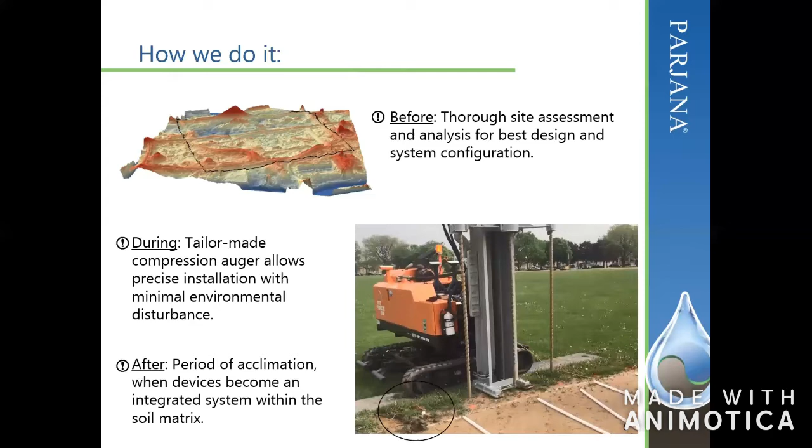After the EGRP devices are installed, how do these actually promote quicker infiltration, and do these need to climatize themselves to the local soils, the quality and velocity of water, possibly even the temperatures of these local communities? So to answer that question, I have here some old images that always come in handy.

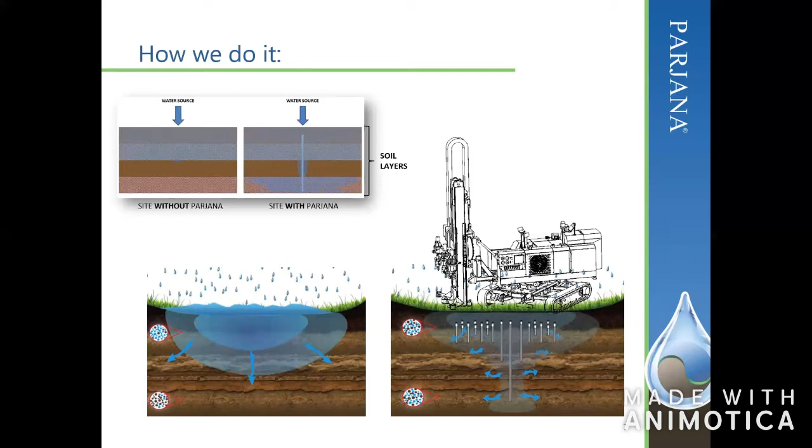Thank you, Lohani, for your expert overview of Parjana distribution and the EGRPs for these participants to fully understand your proven technologies before learning about a number of the diverse projects and applications you're actively involved in across the United States. So let's move into some of these projects. Looking at Belle Isle. So Lohani, what is the first project you wish to share with our viewers, and why did you select Belle Isle? All right, we are going to start with Belle Isle because it's a great representation of what Parjana can do for poorly drained sites.

The project was installed on Shelter 5, which has 23 of the 985 acres of the Isle. The shelter is the little blue rectangle in this picture. So Lohani, can you tell us where the testing procedures were during this study? Yes. Just before seeing that, I will give you a little bit more background. I will tell you the issue that they were having.

What was happening is that the amount of stormwater being discharged into the waste system was way too high. The total cost of stormwater management in the Isle would be as high as $1.5 million per year. So funded by a grant, Parjana took the challenge to infiltrate the stormwater before it would actually reach the system. A third-party consulting company, ECT, was responsible for this study that we are about to share.

The way they set up the study was they put flow meters in strategic locations of the stormwater sewer, both at shelter 5 and also shelter 4, which was taken as the control site right across from shelter number 5. Then ECT measured the flow rates caused by rain events before and after the installation of the EGRP devices, and these are the results.

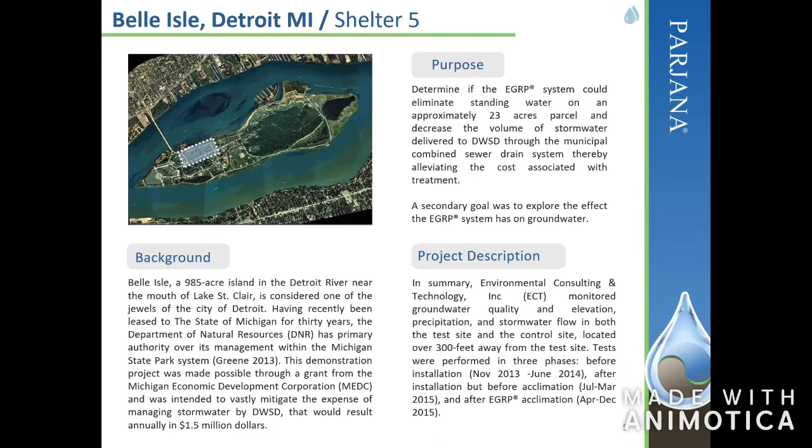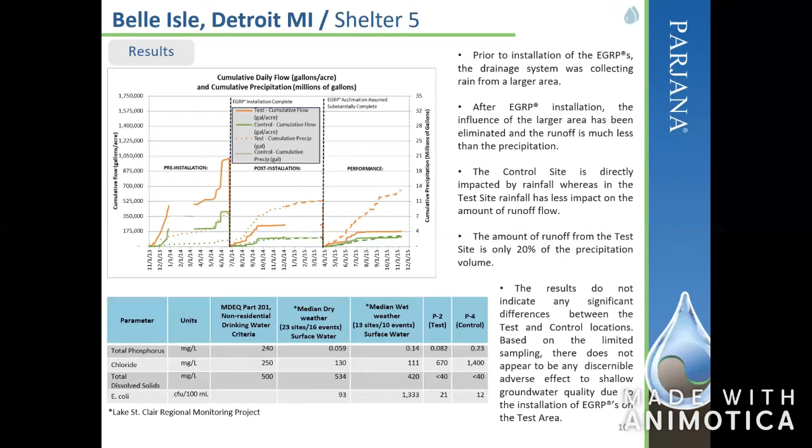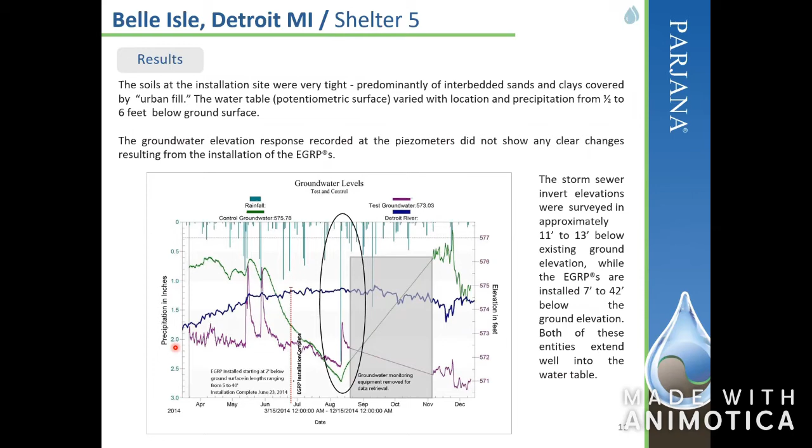These are many excellent ideas here, Lohani. Please highlight the points you just made for ease of our viewers' understanding before we move on to the next project. Of course. After testing Parjana performance, ECT observed no standing water at the test site. There was no measurable impact on the water quality of the affected groundwater. Smaller storms no longer contributed to stormwater runoff from the test site.

The groundwater elevation was not negatively impacted by the EGRP installation. The total runoff measured in the storm sewers exiting the test area was reduced by 80%. And finally, the test area became better drained, thereby reducing the saturated soils. And this completes our Belle Isle presentation.

What a great summary, Lohani. Thank you very much. Thank you.

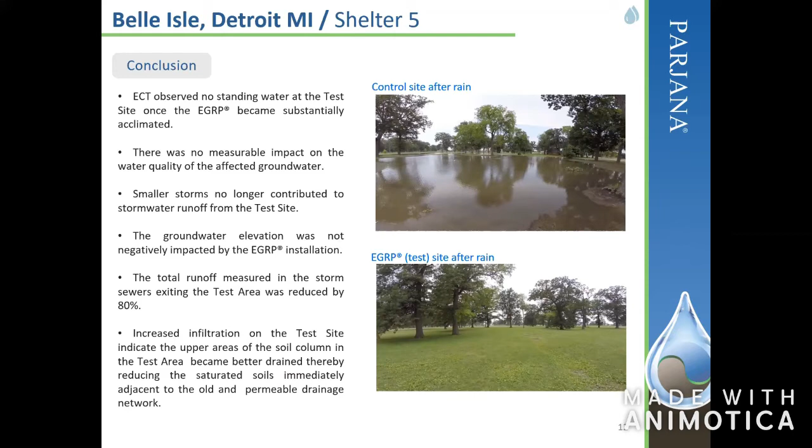This facility has critical importance because about 500,000 people who live in the area depend on groundwater to sustain life. With all of those people using groundwater, its levels have been lowering more and more over the years, therefore the challenge to recharge. We were very excited to be able to work towards such a noble cause.

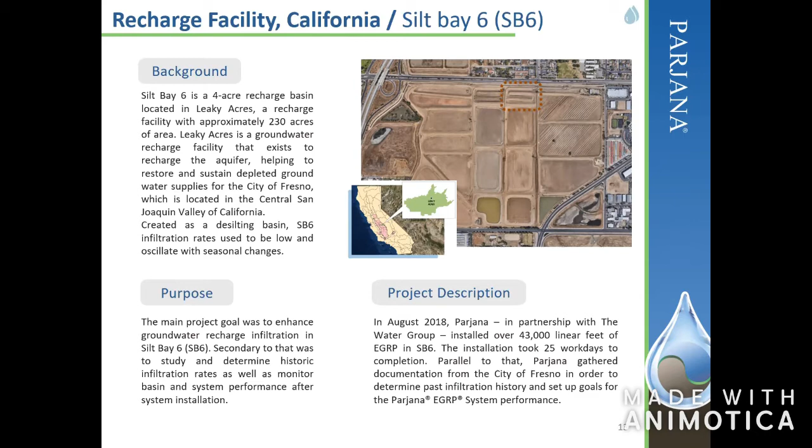What results have Parjana found at the California testing site? So the water levels at the basin were monitored since 2011. Based on those water level readings before the installation of the EGRPs, the basin used to infiltrate a little under 14,000 gallons per day.

After the devices were installed, that number increased to a little over 95,000 gallons a day, an increase of over 6 times the baseline infiltration. If you look at the upper graph, you can see that evaporation, depicted in brown, was 4 times as high as the infiltration before the devices were installed, sometimes even higher.

After installation, the basin started to infiltrate a lot more water than it would evaporate. Note the lower graph, the daily infiltration in green, and observe how those numbers have increased after the system installation in 2018. What are the advantages of infiltrating more water in this case, Lohani? It seems like infiltration is a major finding, most important to every community in the United States.

Well, first, one of the advantages of infiltrating water is that water infiltrated is water not evaporated. Every drop counts when we talk about water supply for over 500,000 people. Second, when water infiltrates quicker, more water can be added to the basin. By doing that, you're able to recharge more water per acre-feet of land in a given period of time.

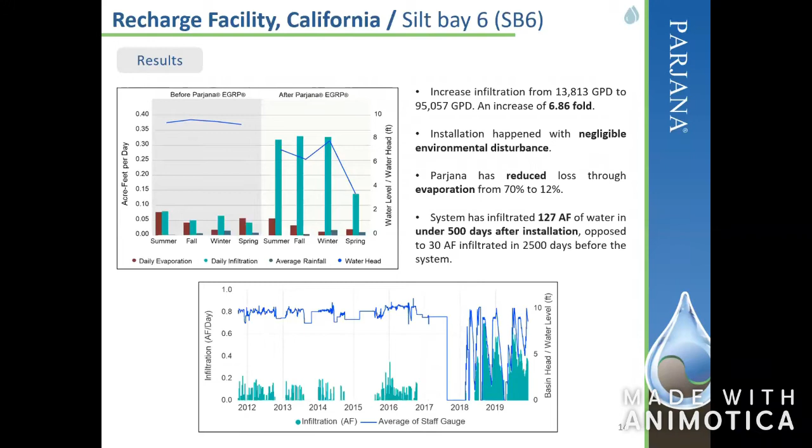So the next project will be about a parking lot in Michigan, and Zena will be the one telling you that story. Hi, Zena. Can you tell us a little bit about this project and why select a parking lot as a sample site? Hi, Dr. Sam. This is a Parjana project at LTU, which is located in a mixed residential commercial portion of Oakland County in southeastern Michigan, approximately 15 miles northwest of Detroit.

LTU was having standing water issues in parking lot D. They could not use the lot during heavy rainstorms because the area was flooded. LTU is leading a collaboration between industry partners. The project features the implementation of innovative and scalable integrated drainage design. This design significantly mitigates polluted parking lot stormwater runoff.

Parjana was one of these innovative partners working to improve infiltration and decrease urban runoff, as well as reduce flooding without having negative effects on groundwater levels and groundwater quality. Another goal is to balance soil moisture. Well, it sounds like there's many advantages here. Please tell us about the project setup and then why this type of setup for EGRPs.

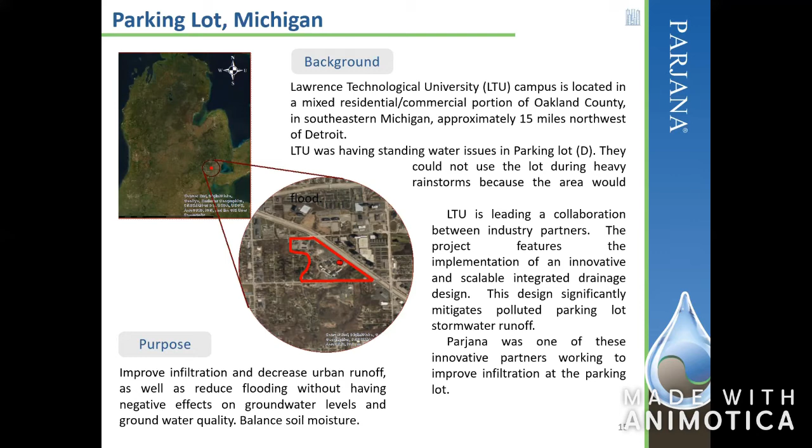Sure, yeah. The integrated drainage system includes three separate patented technologies, including permeable pavement surface to allow parking, an underground engineered soil storage reservoir for volume storage, and our innovative drainage technology to improve infiltration. Installation was completed in January 2016, removing a 20 feet by 25 feet section of the existing parking lot around a catch basin and excavation of soil to a depth of 6 feet.

The catch basin was mounted as an overflow structure, and the EGRPs were installed via drilling around the entire perimeter of the reservoir. In the lower picture, you can see 2 of the 14 monitoring wells dug at the site. Why were these monitoring devices placed at the site, Zena? They were placed there to monitor performance data like movement of water through and around the EGRP, and also the system influence on soil moisture, infiltration, and groundwater level.

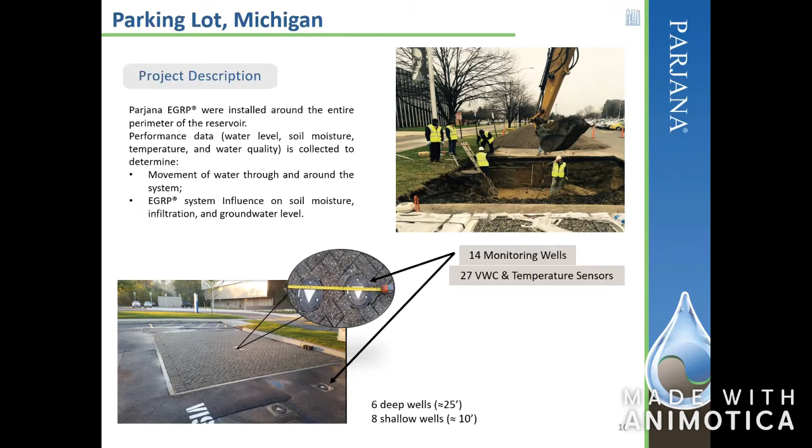And Zena, what dramatic results did you find through this extensive real-time monitoring system? Yeah, first I'll talk about the water quality. We tested 7 parameters and TDS shown here is one of them. TDS means total dissolved solids, measured in milligrams per liter. I picked this one because it represents how the values used to be high and how they have diluted in the present days, showing that the EGRPs do not have negative effects on the water quality.

Zena, do you have other results you want to share at this time? Absolutely. I have these 2 figures to show you the influence of the EGRP system on groundwater direction and moisture content. In 2015, flow direction was moving from the control site towards the center of the reservoir. There was no moisture content data reported at that point. From 2016 through 2019, the average flow direction of the shallow wells started to revolve around each EGRP. Aside from that, I have results for moisture content.

In 2016, the magnitude at 1 foot and 3 feet at the control site was greater than reservoir values at the same depth. At 5 feet, volumetric water content at the reservoir was greater than at the control. That means that at the control site, only the top layer was being saturated, indicating no vertical movement, while at the reservoir, saturation was higher at a deeper level.

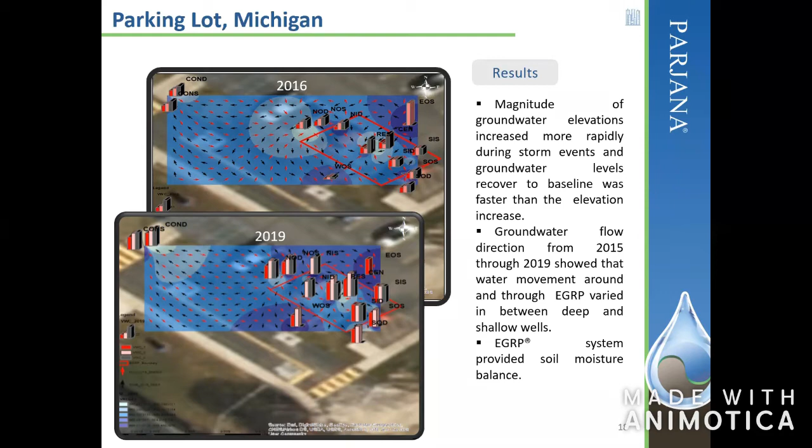So based on what you just shared, Zena, did the project meet, possibly even exceed its purposes? Yes, and the parking lot now is available for use during and after storms, as the pictures show. There was no negative effect on groundwater quality or level. Moisture was redistributed amongst the soil layers. And this is the end of this presentation.

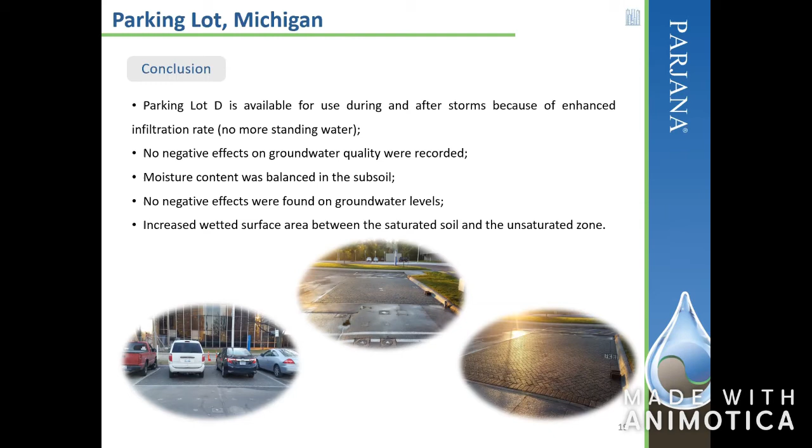Now, Lohani will talk about a residential job. Yes, welcome back, Lohani. It's very interesting that we're now talking about residential areas since we've been talking about parks and commercial areas, even agricultural locations. So share with our viewers about this quite typical residential project, which is so important to homeowners in tens of millions of residential locations around the United States. Sure, I will actually show you two residential applications.

This homeowner had issues for 38 years before he came across Parjana. Water seepage and runoff used to intrude his basement, causing a lot of inconvenience. After we installed the devices there, the basement has been dry and there's no standing water in the lawn. He stated the system performed beyond his expectations. This is how Parjana could improve this homeowner's everyday life. We gave him peace of mind and no more mess to clean.

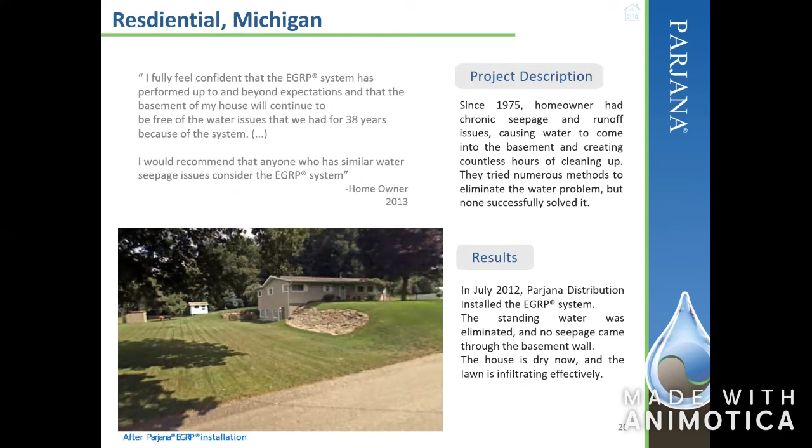And over here is the other residential job. This homeowner used to pump water out of his backyard because it used to be flooded for weeks. After we installed the devices, the homeowner said he was very pleased with Parjana. We made his backyard available to use again. The whole thing about it, we're talking about inconvenience and the mess that it creates, but also it increases the cost of just maintaining a home and having a quality residential place to live. So the cost certainly is a factor in all of this.

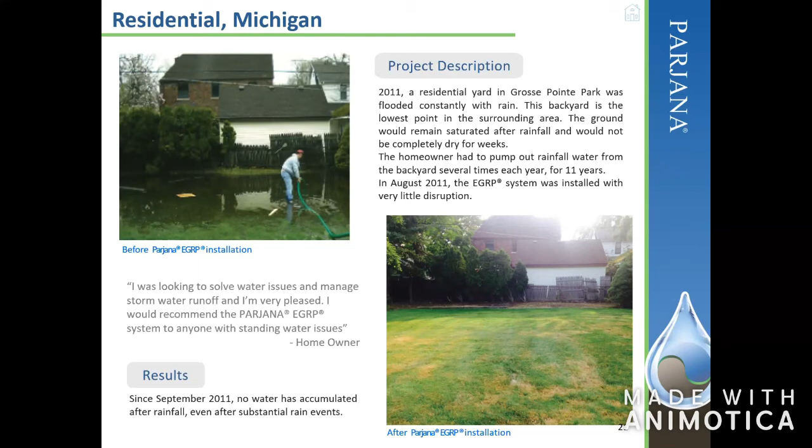In 2017, we installed Parjana EGRPs and also set up a mini observation station with a camera and a staff gauge for reference. The system was designed to infiltrate 1 inch of rainfall in 24 hours. The lower pictures, time-lapse, show 1.06 inches of rain infiltrating within 24 hours. And the animation to the right shows consecutive rain events in December of 2018. A total of 5.56 inches of rain were infiltrated in less than 6 days after that first event. And this is a common situation not only in Georgia, but in many other places of the United States. And this is how this job is heavily connected to other applications in the US.

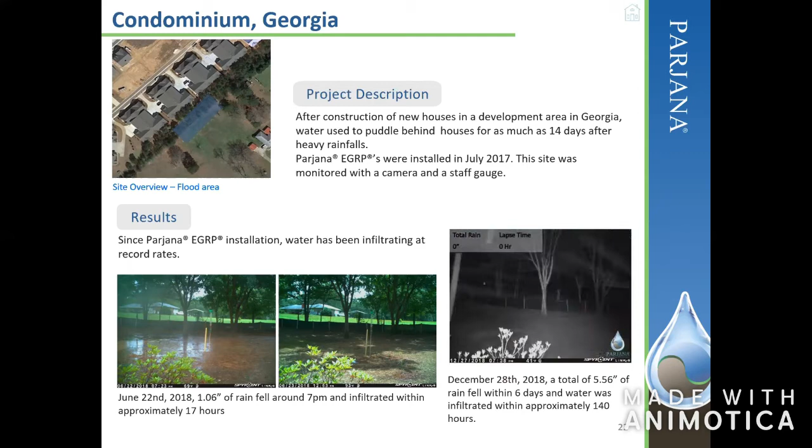Yeah, that's absolutely correct. Baseball fields, of course, there's soccer, football, baseball, softball, field hockey, many other sports, and they all operate out in open sports fields. These are really ideal as carbon sinks, something that we really need as we're facing severe climate change and increase in the velocity of rainstorms, what they're now calling cloud bombs. How does Parjana EGRP systems turn these into ideal stormwater capture, processing, and storage sites, as well as carbon sinks?

One of the benefits of the EGRP installation is that we do not compromise the use of land. Golf courses, soccer fields, baseball fields, they are all regular clients. And we have also done several jobs in parks and recreational areas. So now not only you have an area that can be used for recreation, you also have an area that can infiltrate water.

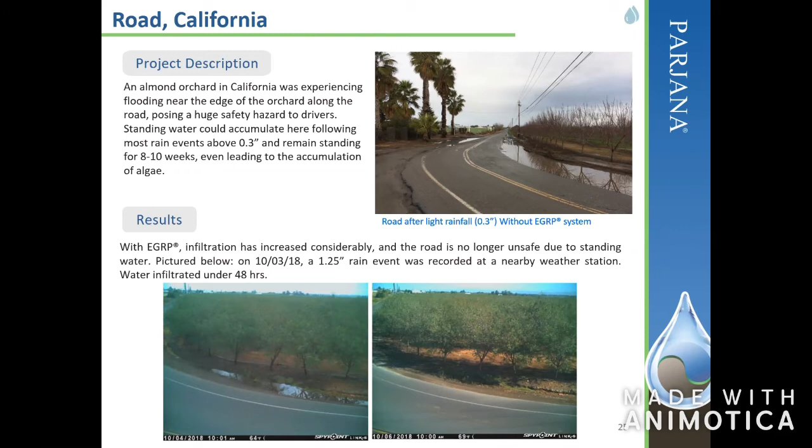This is Joe Kramer coming up. He's the CEO of Parjana Distribution. Joe, welcome to the conversation. Why don't you give us a little recap of the major points that have been made about Parjana, and then we'll open it up to see if there's questions from our listening audience.

Hello, Dr. Sam. We've had a long relationship with you and appreciate all the time that you spend with us. And thank you for participating in all of these webinars that we've had, this one and the past two that we've had over this past year.

Certainly my pleasure. As you can see on the screen, we have four different categories in which we're able to create massive results. In agriculture, three different areas in which infiltration can be beneficial to the agricultural industry. One, healthy soils. We hear a lot about healthy soils lately. And what we're able to do is balance the moisture content of the soil. When creating that balance, we're able to manage the saturation point, available water, and wilting point in which we can help influence the farmer's yield.

Second, farmland is unusable due to extended stay of water on the surface after large rain events. We're actually able to infiltrate that quicker and reduce that burn from the rain and or excessive water sitting on top. Third, the massive scale of farmlands in which we can use that runoff for recharge.

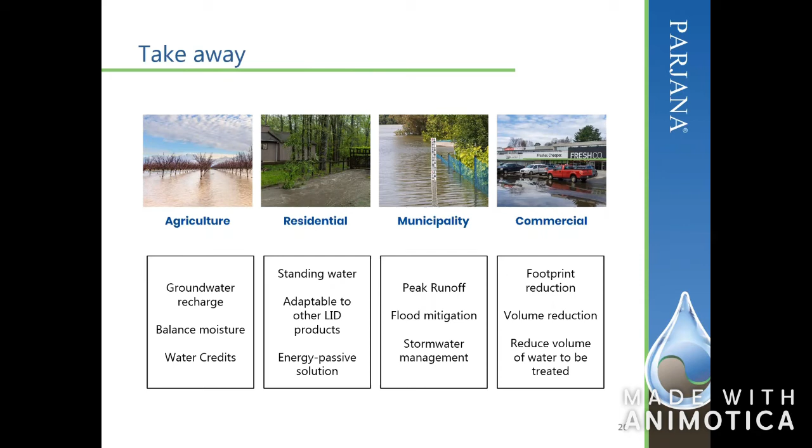So with that, we're going to open it up for questions and answers. So if anybody wants to go down to the bottom of the screen under Q&A and send in any questions they have. Hi, Joe. I already have a few questions here.

I'm going to read the question from Sebastian Uloa, and he's asking, does the EPA consider this to be injection wells? Actually, no, the EPA considers this a class 5 well. If you're looking at an injection well where it's 2 feet below the soil, has a cap on the device, and there is no direct water connecting from the surface down through the EGRP, we create more of an infiltration on a horizontal than a vertical plane.

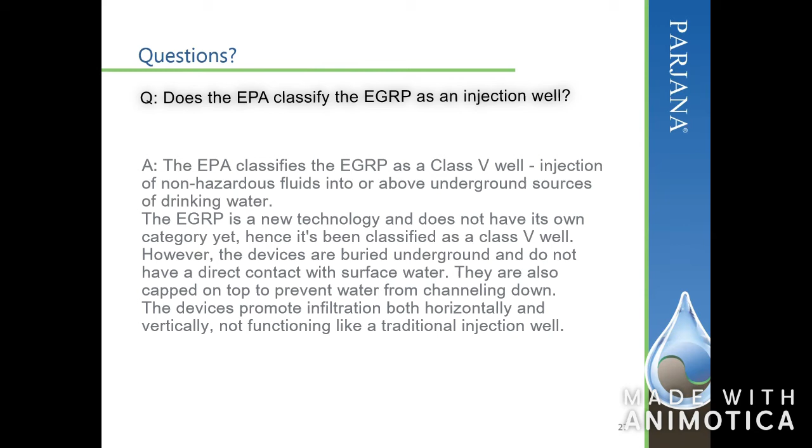I have another question here from Sweta Patel. How can we fix a flat street, which causes ponding in curb and gutter? Well, you saw the one picture of the road in California where you had ponding water on the side of the road. That was actually designed for a 1-inch storm in 24 hours. And it has now been in existence for about 2 years. And we're able to infiltrate that 1 inch in 24 hours on a consistent basis.

The other, as we have spoken about the systems approach, you're looking at a lot of different aspects where you could have water coming down a curb cut, go into a pretreat unit. And by the way, this whole explanation is on our second webinar, which is urban infiltration, where water goes in, we take out the sediment, goes through a medium focal point, breaks down the first flush, goes into a reservoir, our tank, and then we're volume reduction on the outside of that.

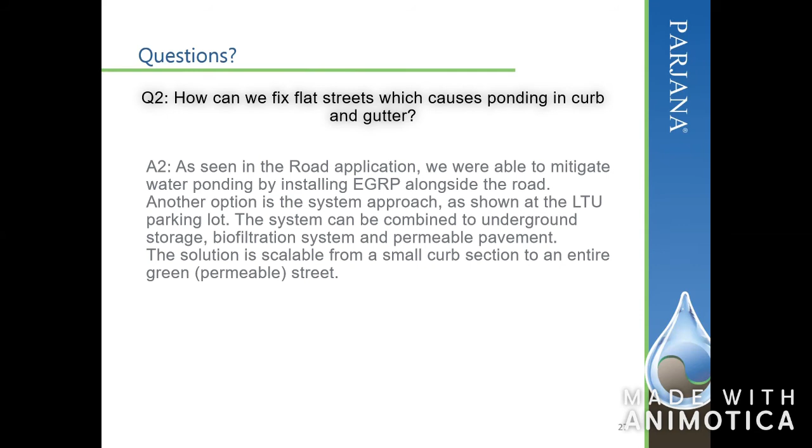Again, that's small scale. We can go 5 feet by 25 foot area and manage the water off of a curb cut and or expand that to any size. Thank you, Joe.

Brian has 3 questions here. I believe we're going to start at the first one. He's asking, what is the expected life of the system? His following questions are, is there a base cost? And is there a money-back guarantee?

Well, on all 3 of those questions, the first one was life expectancy. Life expectancy of the EGRP. There was a study completed by Michigan Tech, and they basically gave the product 150 years plus. On that, the only drawback was UV, and the UV, once it's in the ground, is no longer a situation. For us, it's more of a logistics issue on storage and delivery to the site.

As far as a warranty, there is a 25-year warranty with a 10-year performance. And you asked the question, is there a money-back guarantee? No, there is not. Is there a base cost? Base costs, we're looking at $9.20 a foot.

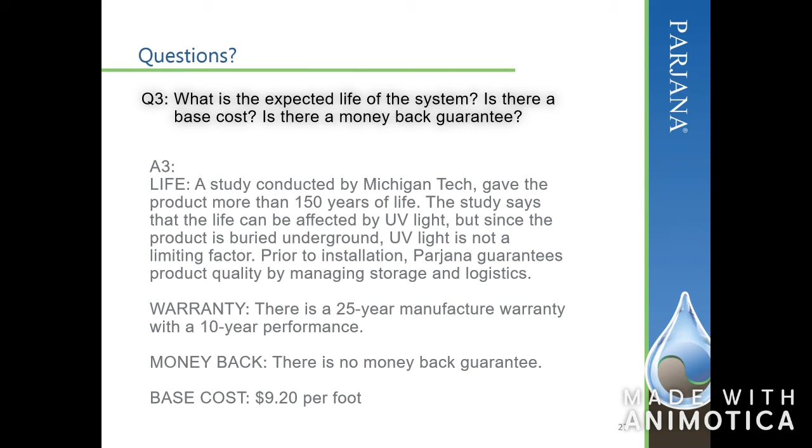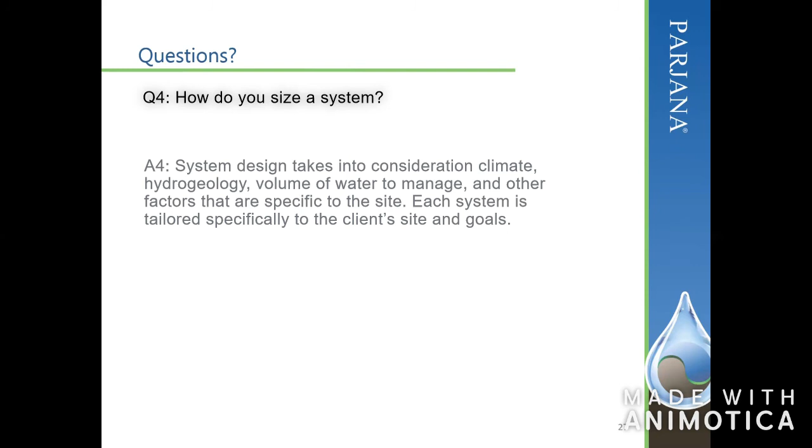Sebastian is also asking, how do you size the system? That's a great question. Each site is site specific, so there are a lot of different parameters that go into that design. Area of influence, climate, soil type, all of those are taken into consideration, volume of the water to be infiltrated, and what storm event, if it's a 1-inch storm in 24 hours versus 72, all of those parameters are taken into design. Thank you, Joe.

I have another question here from Scott Gurnall. From a permitting standpoint, what has been your experience with regulations? With new technology, it's always tough. What we do is look at each case individually, each municipality, what they are looking for, and then we open up a discussion with them, thinking California was going to actually be the hardest.

We've actually gone through a lot of municipalities in California. One, they need to infiltrate. Two, it's following the SGMA Act, Sustainable Groundwater Management Act. So again, they're looking for new technologies to help promote their policies.

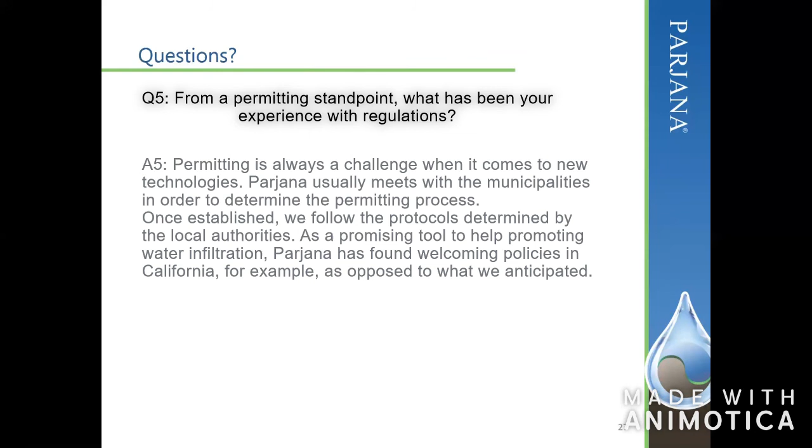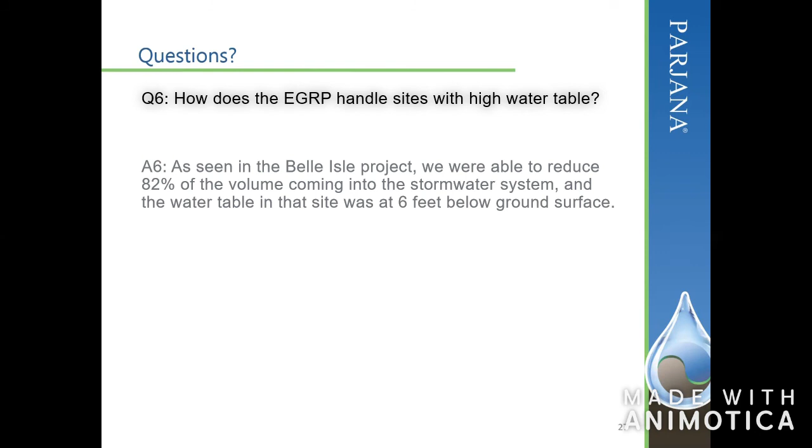Thank you, Joe. I have one more question. Peter Graves: how does the EGRP handle sites with a high water table? As you heard in the earlier conversation on the Belle Isle project, where Lahaini had a lot of the data and went through that data, that was actually designed for volume reduction on the shelter 5 in Belle Isle, and what we were able to do is reduce it by 82.9%, and the groundwater table there was at 6 feet.

Thank you, Joe. Adam is asking, does underground or infiltrated silt eventually intrude into the EGRP and decrease its effectiveness over time? If you're comparing this to the silt that builds up in drain tile and then eventually clogs it, the answer is no. Again, you're 2 to 3 feet below the surface. There is a cap on it. So the earth is doing the natural filtering of the water, and the water is actually moving. Water molecules are moving from soil particle to soil particle.

And what that is doing, again going back to water quality, is the silt is going to be filtered out either through the bioswale at the top, the retention basin, the grass, whatever the surface is; the silt is going to be eliminated there. If it's not being eliminated, hence the explanation I gave of the curb cut, where you have a pretreatment unit that's catching all the sediment and the garbage and everything. So we're using, again, the systems approach to eliminate issues that typically occur with water management systems.

And if I may just complement your answer, Joe, when we install the EGRPs with those augers, they make holes that are a very tight fit with the EGRPs, and the soil is actually expected to collapse around the EGRP. So there is no empty hole where the water goes from the top of the device to the bottom. The water goes through each molecule. So again, it's not a drain, so clogging is not a problem we expect to face, because we become a part of the integrated soil matrix. So there are no holes and therefore no clogging.

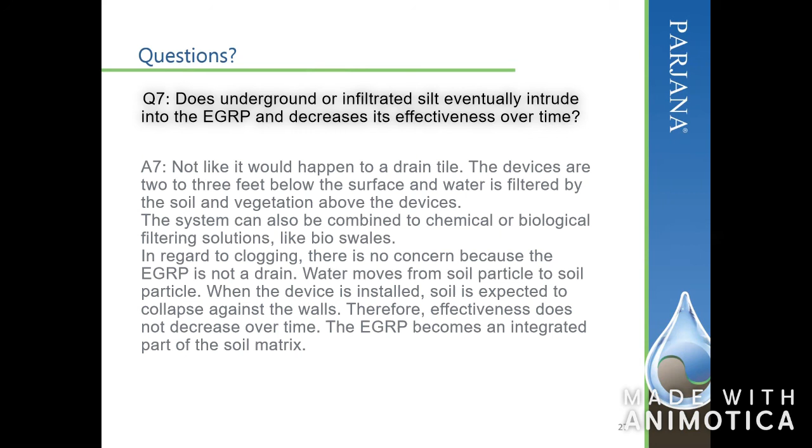And I have one more question here from Tammy. Has your product been used in LA or Orange County in California? It has not been installed in LA or Orange County. We're up through the Central Valley and then up into Stanislaus County and coming back down. We have a couple of potential projects in San Diego and the surrounding area.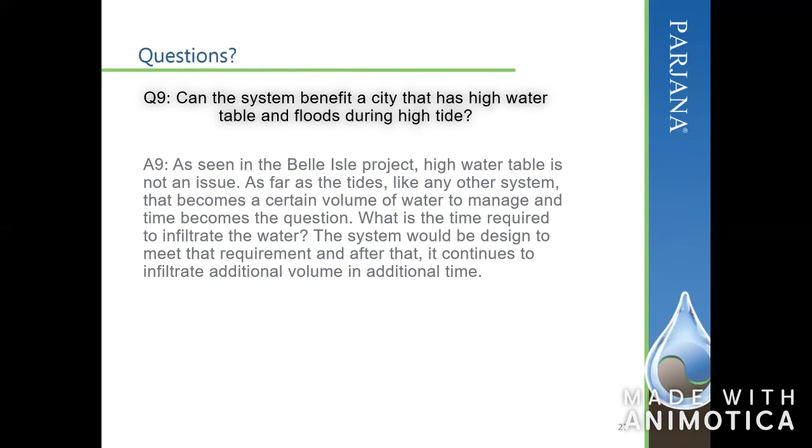So if we have a volume of water that's equivalent to X, and we design for that, if you exceed that, it's still going to infiltrate it, but what's going to change is your function of time. So we're still going to infiltrate it. If it's not in a 24-hour or a 72-hour period, it's going to take longer to infiltrate, just like Lohani was showing on the Georgia project, where we had back-to-back storms. We were designed on that project for a 1-inch storm. It just took more time to infiltrate that larger storm.

Thank you, Joe. Dr. Sam? Thank you very much, and thank you to all the listeners to this very important discussion, because stormwater and groundwater capture, processing, and storage, and then of course turning it into new water, is a topic that's coming up for local government and even homeowners across the United States and around the globe. So what you're doing at Parjana, Joe, Lohani, and everyone there is critically important. You really are on the leading edge of this technology, capturing the water and turning it into something very useful as new water.